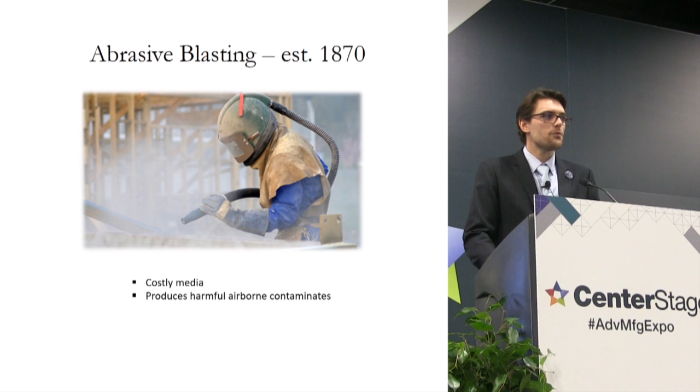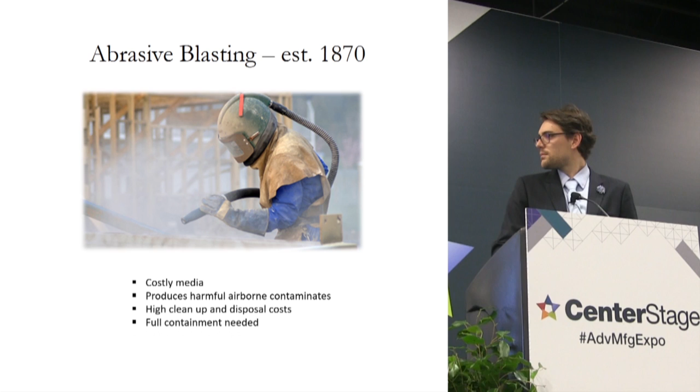Typically, abrasive blasting has a higher media cost. It can produce harmful airborne contaminants, which can be hazardous to worker safety. It has a high cleanup and disposal cost, as well as you typically need full containment and negative air when you're blasting with abrasive.

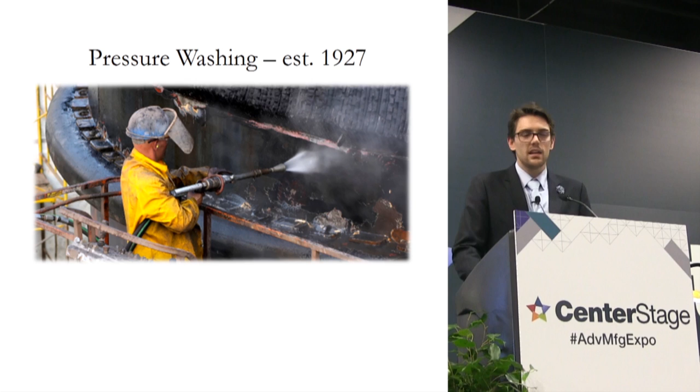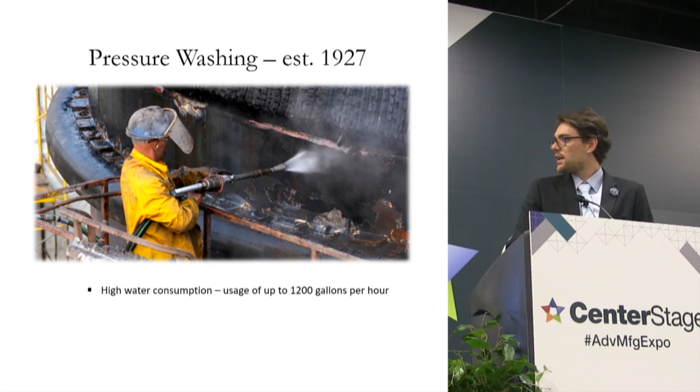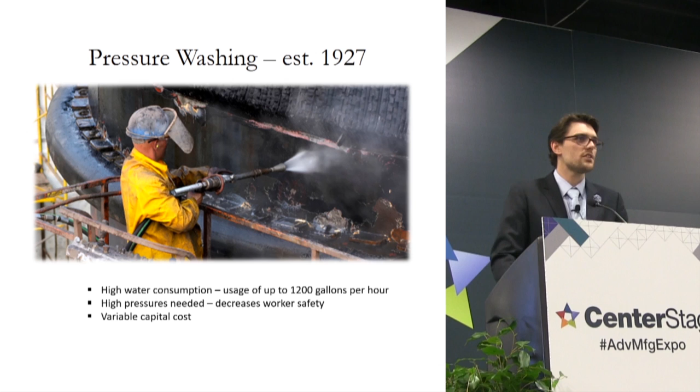The next big innovation was pressure washing in 1927. Pressure washing uses high water consumption, and it varies in the technology, but it can use up to about 1,200 US gallons per hour. High pressures are needed, which decrease worker safety, typically up to or exceeding 5,000 psi. Variable capital costs, so some of your larger systems can be in the low six figures.

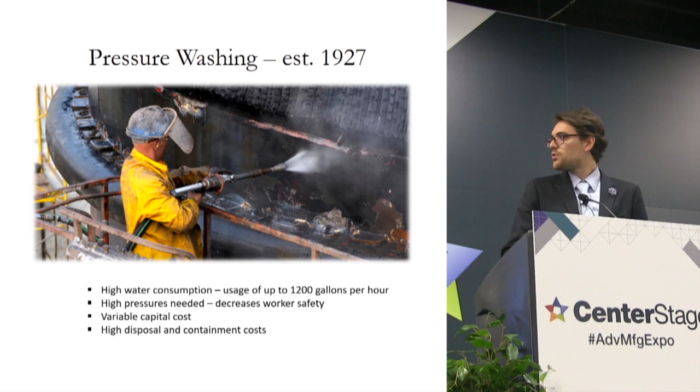And it has high disposal and containment costs. So if you think of using and creating 1,200 US gallons of water waste per hour, now trying to treat that and then dispose of it can be very costly depending on what you're blasting.

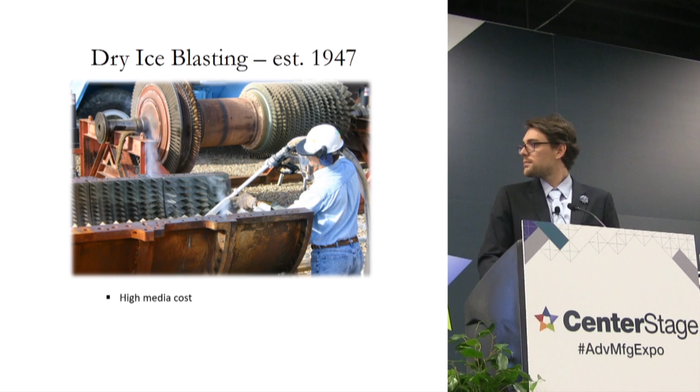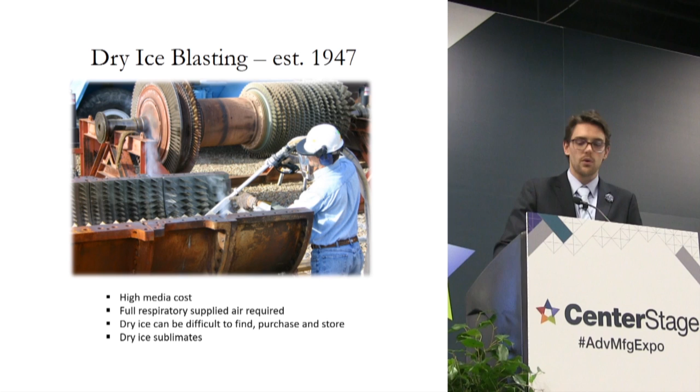The next big innovation in 1947 was dry ice blasting. And some of the drawbacks of dry ice blasting can be a higher media cost. Full respiratory supplied air is required, especially in confined spaces where it can be dangerous to the workers. Dry ice can be, in specific locations, difficult to find, purchase, and store, as well as dry ice sublimates.

So the question we asked ourselves before we started looking at this technology is really what happened to the innovation after that? Because it really started to slow down and stagnate. And one of the interesting trends that we started to see is after the invention of dry ice blasting, the innovation nearly stopped, and meanwhile environmental regulations continued to increase.

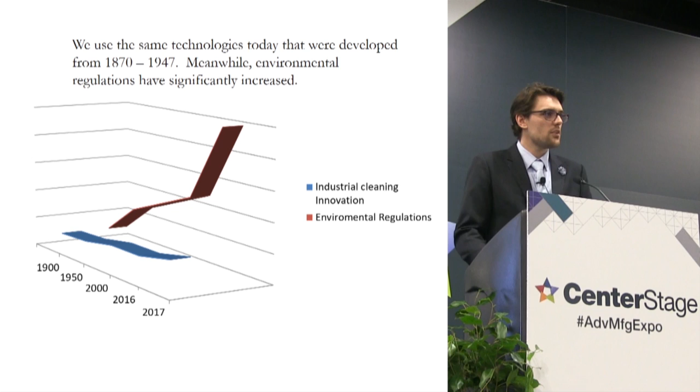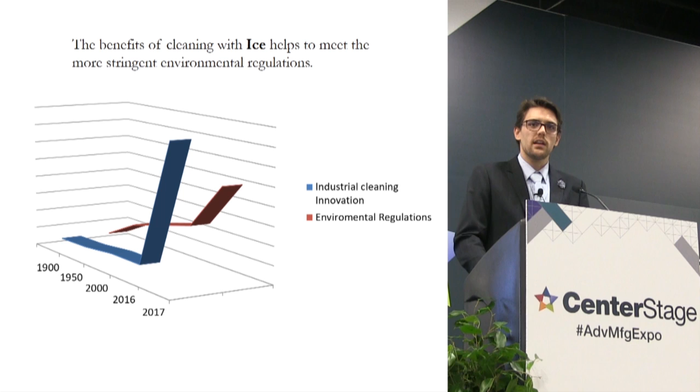Whereas now, introducing the benefit of blasting with an ice made from water, we feel that we're meeting a lot more of those environmental regulations that are being put on today. So now we'll introduce ice.

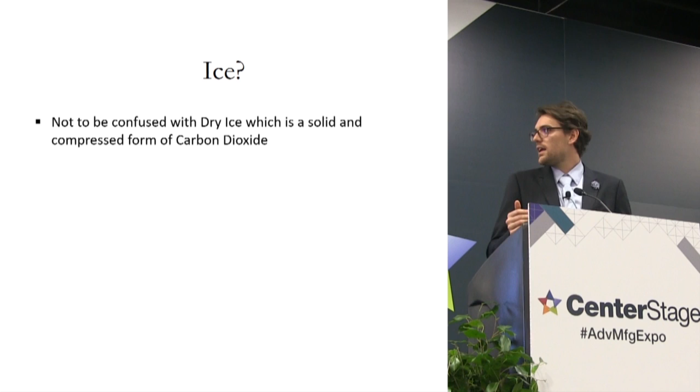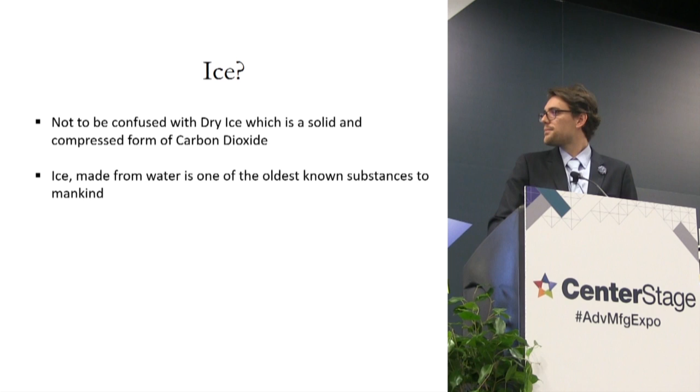A lot of people ask us, what is ice? They're so used to dry ice blasting referring to ice that when you start talking about just generic ice, our ice is not to be confused with dry ice blasting. Dry ice is a solid and compressed form of carbon dioxide, versus our ice is made from water, which is one of the oldest known substances to mankind. The ice we use is typically freezing water at a temperature about -5 to -7, so you can touch it, you can put it in your drink.

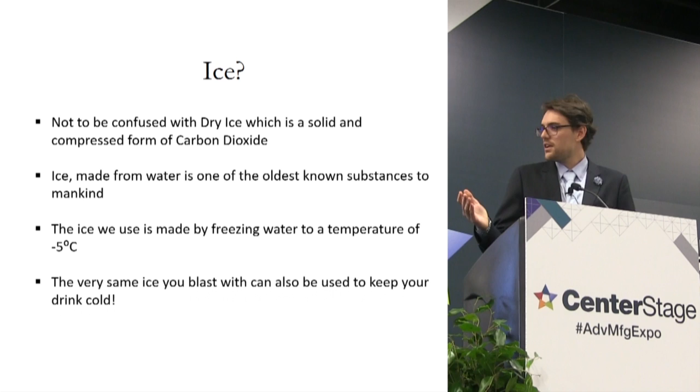The next big question people ask us is why ice? Why is ice made from water better than dry ice or abrasive blasting or pressure washing? Well, ice is actually a superior cleaning and deburring media. It is the only media that actually exists in all three phases, which means it hits the surface as a solid. Then half of it turns into a gas, which evaporates, and the other half stays in a liquid form, which actually pulls all your airborne contaminants down to the ground and creates minimal airborne contaminants.

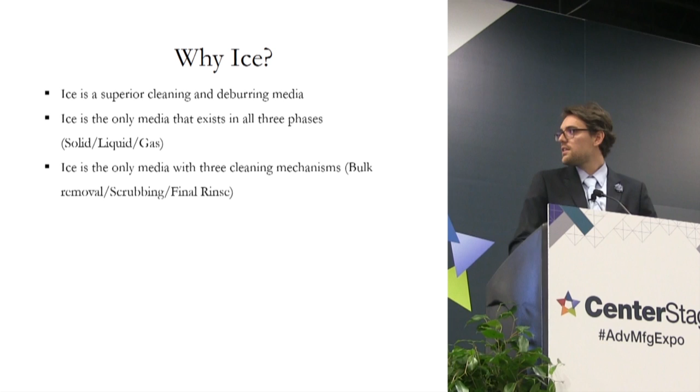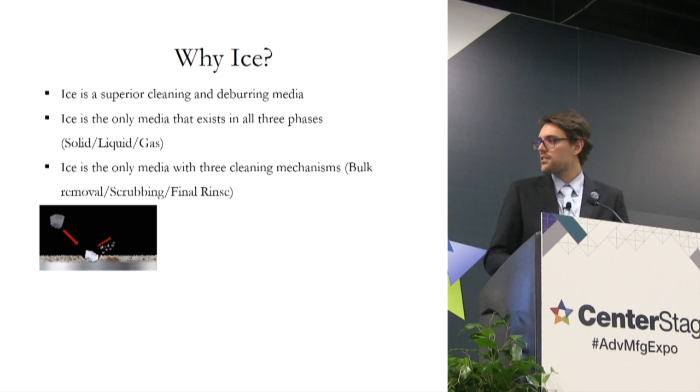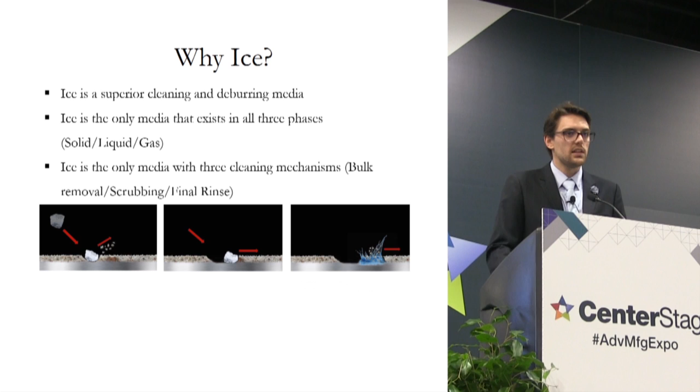Ice is the only media with 3 cleaning mechanisms. So the first is the bulk removal. When the ice first hits the object or the substrate that you're blasting, it removes the major particles. Each new piece of ice then acts like a bristle on a brush, scrubbing the surface. And then there's the final rinse where it turns into its liquid form and it creates a clean blasting surface. And as mentioned before, it produces minimal airborne contaminants. Yes.

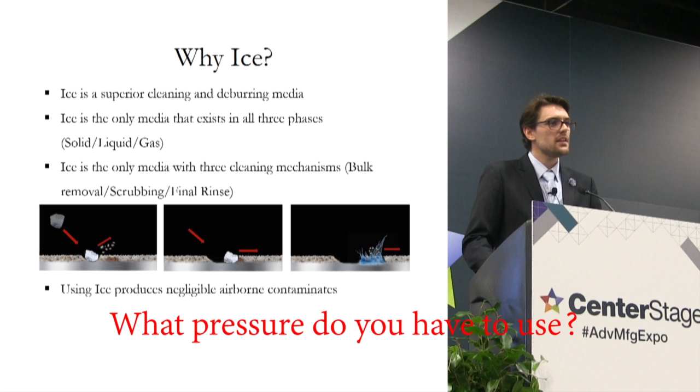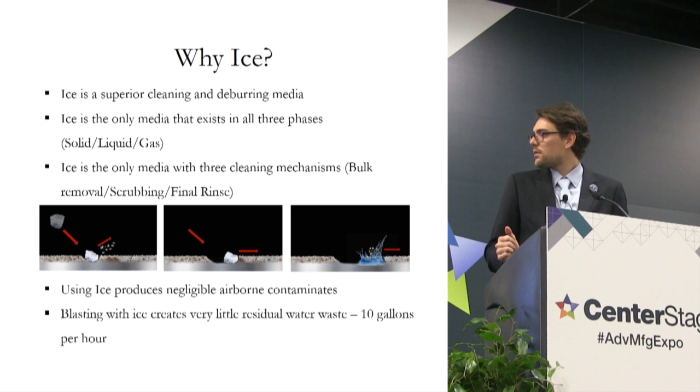Typically, the pressure that we use is about 80 psi up to 150 psi. So it's very low pressure. In CFM, we blast anywhere from 100 up to 300 CFM. Blasting with ice actually creates very little residual waste, and on average, blasting at 3 pounds a minute, you'll have around 10 gallons an hour of water residual waste.

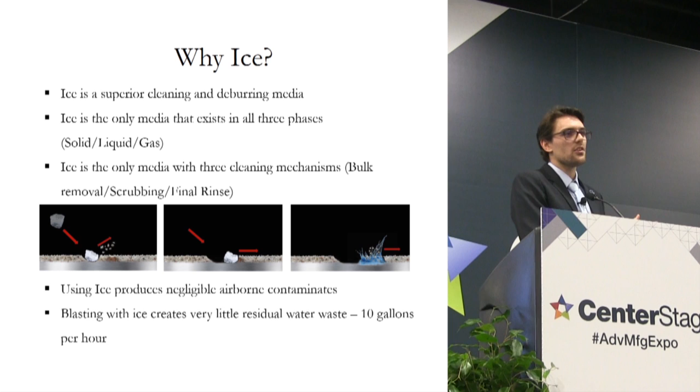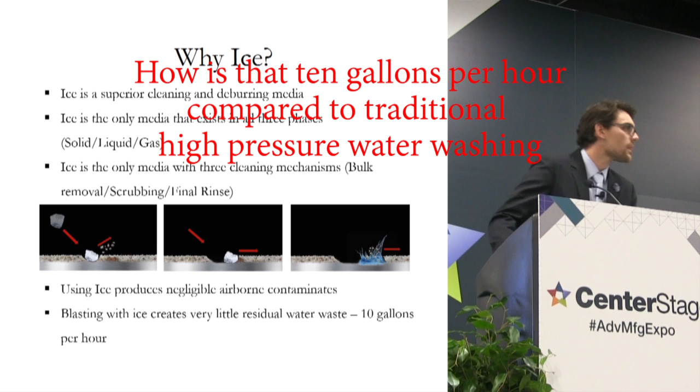And of that, the easiest way to describe it is if you picture a Slurpee like you buy from 7-Eleven. That's what your contaminant looks like. It looks like a Slurpee right below where you're blasting. That's the color of whatever you're taking off, whether it's paint or bitumen, etc. Question: how is that 10 gallons per hour compared to traditional high pressure washing or water washing? For example, high pressure water washing can consume up to 1,200 gallons an hour.

So how can ice help me? A question that's always posed to us. Ice is a very low-cost media. Of course, it's easy to buy because you can buy it at any grocery store, but also you can make it yourself. With your own ice maker, you can make it for less than a penny a pound. So you just need ice cubes? Just ice cubes. Ice cubes, bricks of ice.

I know in industrial cleaning, one of the things that people come to us all the time with is a lot of the jobs are on a weekend, for example. And with dry ice, you have to buy it on a schedule. So if your delivery period is on a Monday and you're blasting on the weekend, not only do you have to wait that long and factor in sublimation, but also if you run out on the job site, how do you get dry ice on the weekend? It's very, very difficult.

Does it need to be pure? It can be made from any type of water source. Tap water, for example. A lot of ice is made from tap water. A lot of our contractors, whether they're in a plant or even in their trailers, will have their own ice makers, or you can put it in large totes, 300, 400, 500 pound totes that'll last for 4 or 5 days holding the ice.

Ice is safe to operators. A way we gauge media and how safe it is to an operator is, can you hold it? If it gets in your eyes, are you going to be okay? If you drink it, is it okay? Well, ice, of course, meets all of those. Ice is a very effective cleaning media, so in a lot of cases it's actually quicker to clean with ice than a lot of other cleaning tools on the market today.

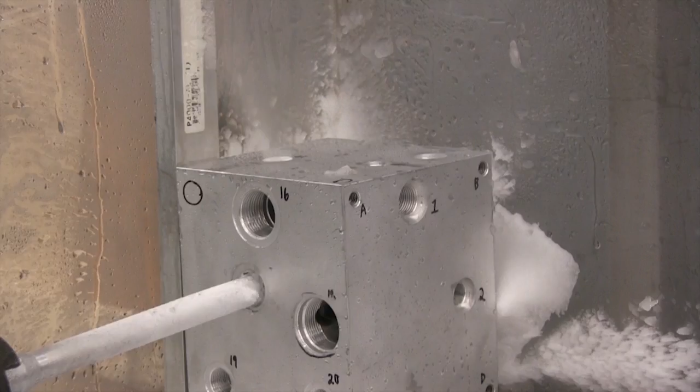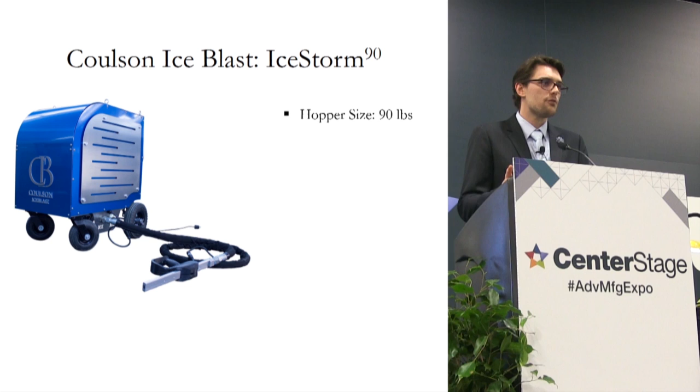This is the technology that we showed in the video, just some of the quick hits on it. It holds around 90 pounds of ice in the hopper. So based on your feed rate of ice per minute, that allows the operator to blast for about an hour. Currently it doesn't have a refrigerated hopper, but it's fairly highly insulated. So you can leave your ice in the hopper for about 3 hours on a 40 degree day, and you're going to lose about 3 to 4%.

It runs off typical 110 volt power. It has a 48-month warranty. It weighs 250 pounds. Operating pressures, as well as variable ice feed rate. The particle size: when you put your ice cube or brick or whatever type of ice in, it crushes it down, almost like a rock crusher. And it has a particle size coming out the nozzle of almost 3 millimeters in diameter. So it's fairly small. We like to think it's about the size of a grain of rice. So that's the size of it coming out.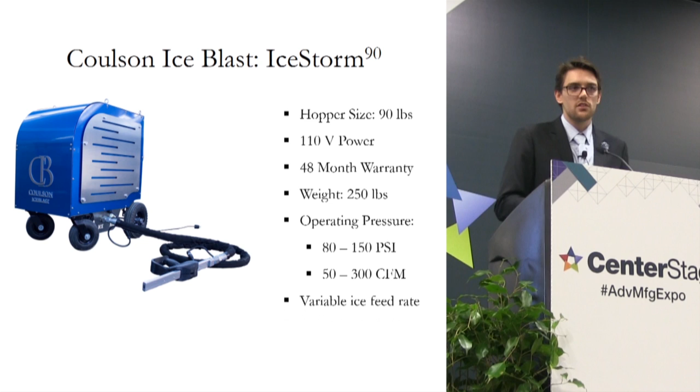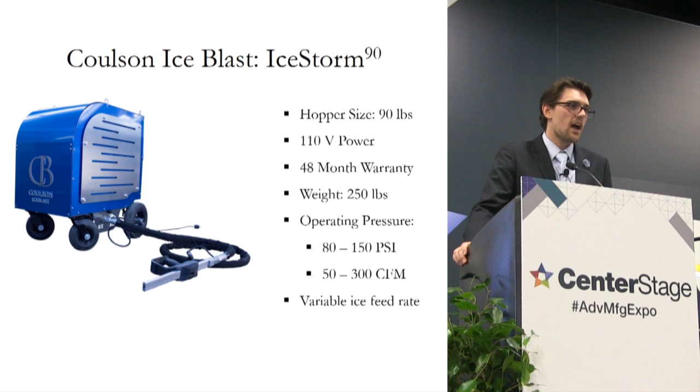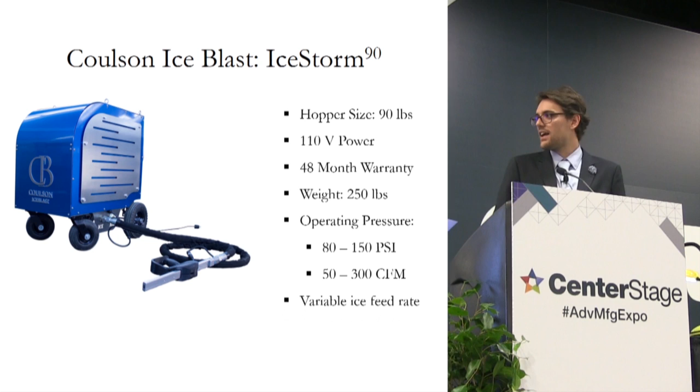Of course, blasting with ice, there are some advantages and disadvantages we had to work with. Ice is very difficult to move through a hose because you're worried about the heat transfer of the air into the ice and the melting, etc. So it needs to be run with an aftercooler, for example. We had a special set of nozzles developed for the technology. We brought in a gentleman that has the record for creating the gun with the fastest bullet in the world to take the ice and see how fast we can get it going.

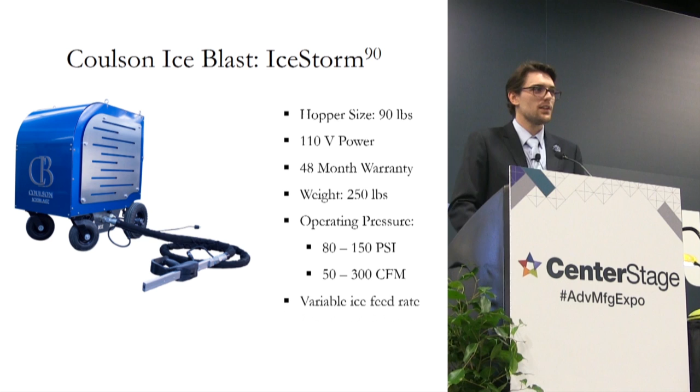And we actually accelerate our ice out of the nozzle at about 600 miles an hour. So it goes very, very quickly. So it's not something you want to get in front of.

But other than that, if anybody has any questions or... Oh.

Do you have a mic? Can you bring this, Jim?

Yeah. So you need to have, of course, power, which is your standard 110 volt, and then a compressor of some size. If it's in a plant, a lot of times we just plug into plant air. Typically, I know one of our markets is targeting industrial cleaning contractors. The standard compressor they have is like 120 psi, 300 to 325 CFM. So a lot of times that's what we run off of.

How is it better than dry ice? In a lot of applications it's more effective and efficient, just the way the ice works compared to dry ice. Of course, dry ice is a bit of an explosion on the surface, so the surface has to be much harder. Versus wet ice, we're having a transfer from a solid, and then it hits it and it has actual mass that transfers into it before it switches into a liquid or a gas.

But also media cost is a big component to that. Of course, you can make ice for less than a penny per pound, and dry ice, where we're located, as an example, in Vancouver, Canada, dry ice costs me about $1 a pound delivered. So it can be fairly substantial depending on where you're located. Yes?

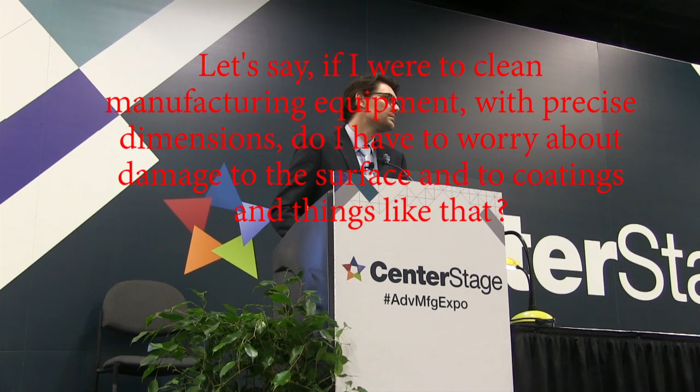Hi, so from the video that you showed earlier, it looks like the common application of this equipment is cleaning more of the exterior, cleaning up the dirt, the rust build-up. And my question is, how abrasive is this process? Let's say if I were to clean manufacturing equipment with precise dimensions, do I have to worry about damage to the surface and coating and things like that?

So that can be fully controlled. We can clean as gently as going over a board with fine wires and gauges, and we won't damage any of that, to the extreme that we can cut aircraft aluminum in half. So you can really vary the abrasiveness of the technology. Okay, so that goes together with the variable ice feed rate you mentioned just now. It's a combination of the pressure that you're using and your feed rate of how much ice you're using per minute. Gotcha. But it can be very controlled.

And we've done systems for Ford Motor Company for deburring gears, to Denso Bosch, cleaning fuel armatures. So we have done many automated systems as well, which we work on designing and creating. When you're talking about deburring, it's for metal parts, for example? Does it work on small metal parts like CNC stuff? Yep, we do a variety of deburring applications, from deburring micro gears to larger objects that are being machined.